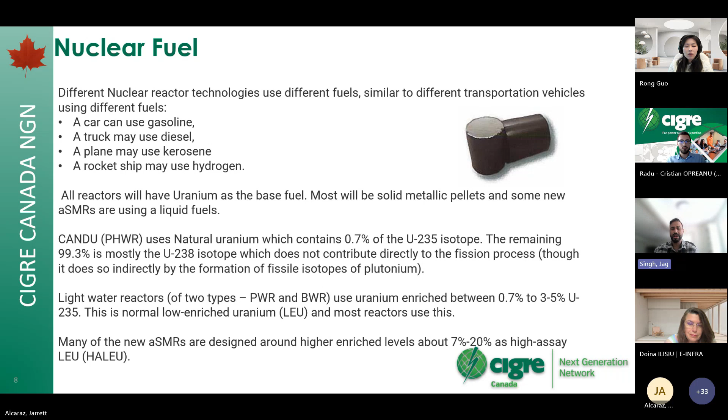So it's really important to understand the different reactor technology types are based on the fuel that might go in them. Here we have the CANDU reactor using natural uranium. What that drives is a technology which utilizes or requires heavy water - D2O. That heavy water is essentially acting as a moderator. So as the moderator goes around in that coolant loop, it slows down the neutrons we were talking about earlier with the fission to the right energy level so that it can be captured by the neutrons to go ahead and then maintain criticality - that's what's unique.

Having the necessity of having natural uranium drives a specific reactor technology type for it to work. If you try to use other pressurized water reactor technology, it wouldn't work, right? Because you're not getting the neutron capture at the right energy level. It's not slowing it down. It's not moderating that neutron enough to get captured.

So it produces more energy per kilo of mined uranium than other designs, but then also produces a much larger amount of used fuel per unit output. So there's pros and cons to everything. There's no perfect solution. It depends on what the needs are and what the requirements are of the operator, right? And that's the key thing.

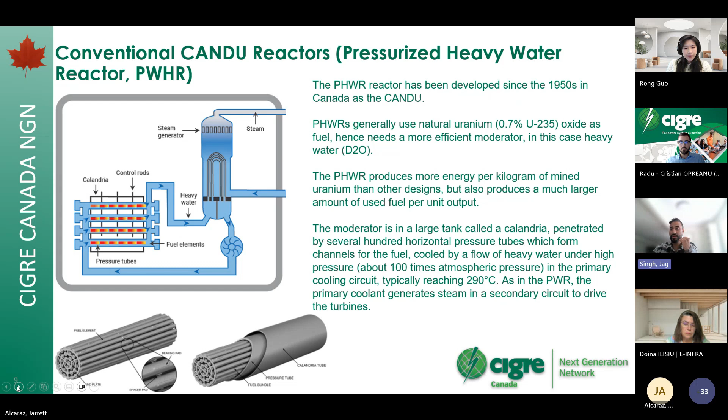It's like if you have a performance sports car, you don't necessarily want a diesel engine. If you want a high fuel efficient car, you are going to go for the diesel engine. So the reactor technology type goes hand in hand with the fuel.

So because of the size, what you're able to do is a lot of offsite works acceptance testing and factory acceptance testing and qualification, right? You can essentially modularize them off, right? That's what the M in SMR says, modularization.

Think of it building the whole unit, the core, or even some elements of the balance of plant, constructing that in a warehouse, cold test it, which is no nuclear fuel, right? Do your core testing behind it, check the pressures, check everything's working, and essentially wind back all the cables, disconnect all the piping, cap them, flange them, take it onto site, and then hook it up.

Because some of the most expensive projects, we're up at 32 billion pounds at Hinkley Point C. Vogtle went to $35 billion. That's what happens on conventional projects, because you have to do all of that exercise on the actual site itself, which drives up costs massively. Anything you do on a nuclear site drives up time and cost just because of the measures that you need there, right?

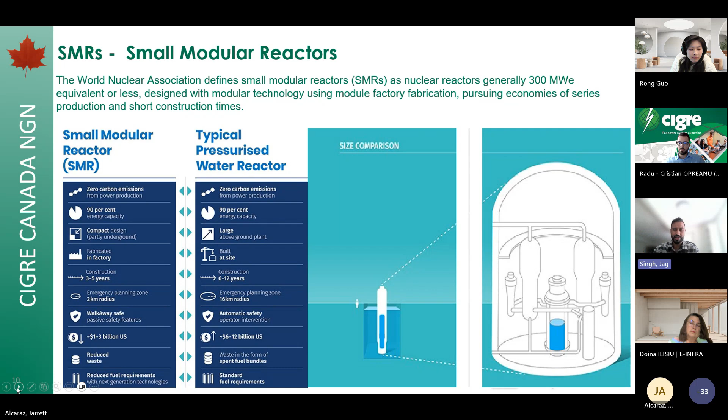The cost is significantly less. One, scale. Two, repeatability. Three, the idea is to run it off a production line as you would a car, right? On a manufacturing line. And some of the reactor technologies will have reduced waste, and we can talk about that in a second as well. So a lot of differences, and again, pros and cons. You do get less power output than you would from a conventional reactor.

So here's an example of the GE Hitachi reactor here. This is based on the boiling water reactor designed by GE Hitachi, the big one, the ABWR, and it's just a smaller scale. This is a Gen 3 plus reactor. And the idea here is you essentially push the water circuit through the actual reactor core, which turns it to steam, which turns the turbine. So you're actually boiling the water using the reactor, okay?

The refueling cycle on there, so every time you change the fuel, is 12 to 24 months, so 1 to 2 years refueling. And you've got a design life there of 60 years. It's 300 megawatt electric, and what that means in reality is that's powering the equivalent of 300,000 homes. So even though it's an SMR, that's a huge amount of energy that you're outputting, and it's stable baseload energy, which is different to your intermittent supplies of solar and wind.

We're able to essentially run this thing 24/7 for about, let's say, 320 days a year, accounting for plant outage and maintenance time. So massive amounts of baseload power, which is reliable and a high energy density.

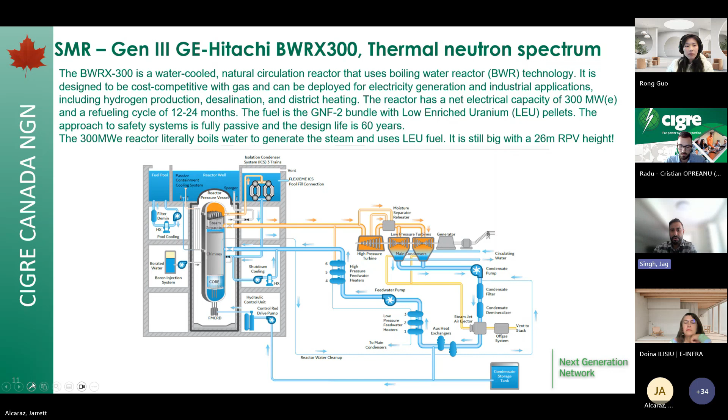So if you need steam generation for SAG-D up here in Alberta, you need high temperature clean steam, you can get that from one of these reactors. You don't even need to hook it up for electric purposes now, right? You're hooking it up to just provide steam. So that's kind of the different applications you can get for SMRs here. Each reactor technology type will have different applications.

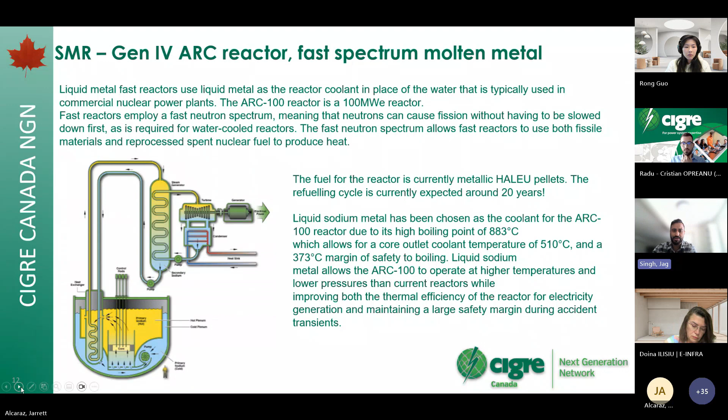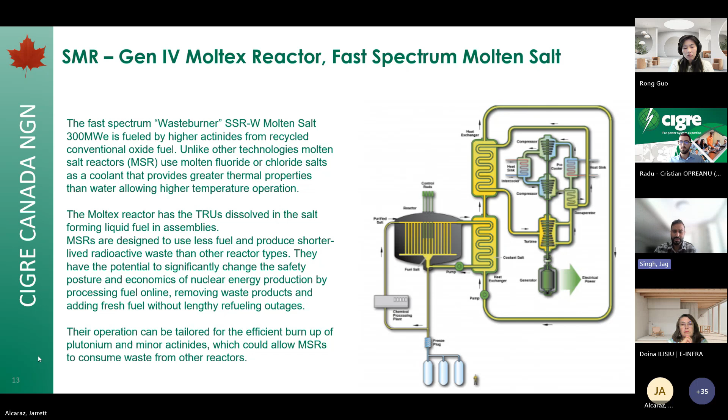And as we're saying, we can close the fuel cycle. So the output of this, once you end up with spent nuclear fuel of this, goes back into the recycling plant, the sister plant to this, to create more fuel. So you actually burn out a lot of the waste forms that you typically get from a nuclear operation. So really innovative technology, really, really important.

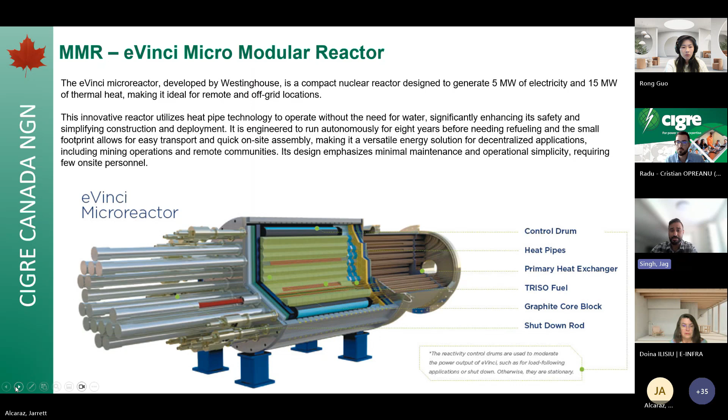So it's a lot smaller. This is supposed to fit on the back of a semi, so it's easily deployable, and it takes up a lot smaller footprint as well. It's really, really important that we start looking at all different scales and sizes of nuclear reactor technology.

We'll talk a little bit about safety, waste, and cost. These are kind of three of the main areas that I always get asked questions about. What do we do with the waste? These nuclear plants are expensive, and what about the safety side of it? So we'll talk a little bit about safety.

As I mentioned earlier, some of the Gen 4 reactors now are self-regulating, self-shutting down. It's essentially impossible to have a nuclear meltdown, right? Because here's a safety feature, a negative void coefficient that features in one of those reactor technologies there, which is the hotter the reactor gets, the less reactive it gets, essentially. So it's self-shutting down. It prevents the runaway reactions, and you end up essentially having an inherently safe, walk-away safe reactor.

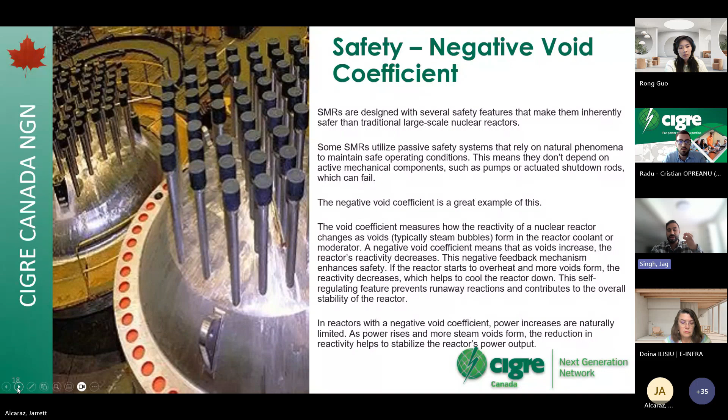You're going to keep hearing this term a lot now as we go into Gen 4 reactors and some of those innovative technologies. So that's the negative void coefficient, and the way it works is you end up with these kind of voids in the form of bubbles, and that reactivity then becomes very inefficient and it shuts itself down.

Some innovations, we saw some reactor technologies in TRISO fuel, the eVinci, for example. And this TRISO fuel, that's become the safety element of this now. So as you would typically get those fuel ingots where you'd have the fission products and decay products featuring in the actual fuel, this is contained now within a ceramic ball. So the fission products are contained within this, and they're tested and qualified up to insane temperatures.

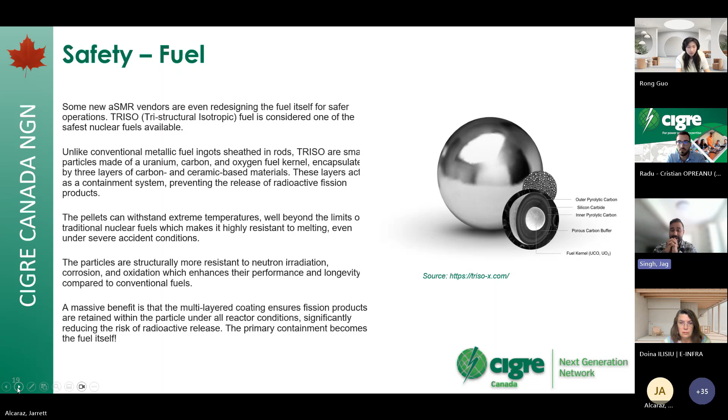We're talking really, really, really high temperatures where they don't melt because it's a ceramic form. So the idea again is the fission products are contained within this, and if it can withstand those extreme temperatures, the fuel itself is inherently safe now. Innovation goes beyond just reactor technology and now into fuel as well.

Waste. So we get typical waste forms: low-level waste, intermediate-level waste, and high-level waste, and it's classified as such depending on its heat output and radioactivity, the dose output. As we fission away that fuel, only 10% of it is actually fissioned into the daughter products. The rest of it's actually unspent fuel, right?

That's why the term waste form is now called used fuel form, because there's a real intent. The UK does it, the US does it, France does it, and you can recycle and reprocess that fuel. You can actually strip away the 10% and then reuse the 90% essentially.

So what is nuclear waste? As we fission away and we split those atoms, that's what the daughter products are. That's what the fission products are. The daughter products are the split atoms, right? That's what is widely known as the nuclear waste. And it's important to understand that there's all sorts of different radioisotopes that are formed here.

Those that are high dose have shorter half-lives, right? So those half-lives come right down, but they're very, very active. They're pretty dangerous, actually. So the idea is, as soon as you have nuclear fuel in a conventional reactor, you want to essentially store it in a spent fuel bay in a pond, a giant swimming pool of sorts, for 7 years to let them cool.

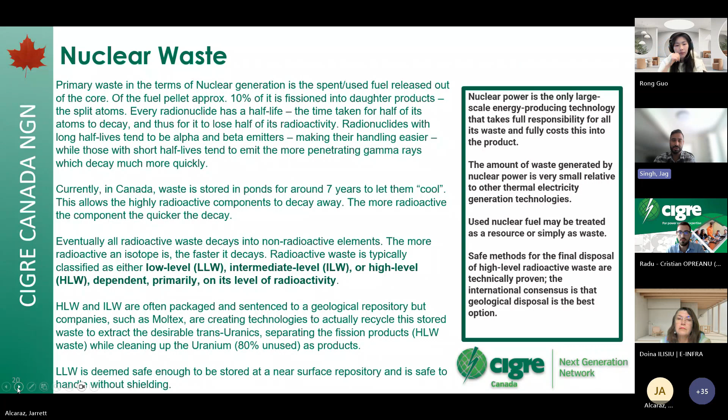Okay, so I'm going to quickly skim over these because I know we're getting short on time here.

If we were to take all the generation of the US fleet over the last 60 years and put the nuclear waste on a football pitch, it would essentially stack to a depth of less than 10 yards. All that power for 60 years across that entire fleet that we saw earlier is less than 10 yards. That is an immense amount of energy output per waste produced, right? You've got to be really cognizant that that's the case.

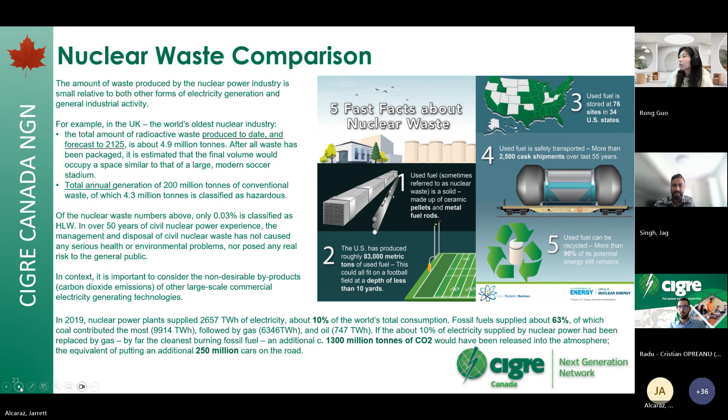There's a rendering of it right there. You can see all 60 years of the entire US generating fleet, that's how much waste output, which is not a lot. Here's another infographic here. Look at that bottle just on the side there. Every year, the UK's nuclear power stations produce 0.84 litres of waste per person. Of that, the high-level waste, which is the dangerous stuff we're talking about, is only 25 millilitres per person.

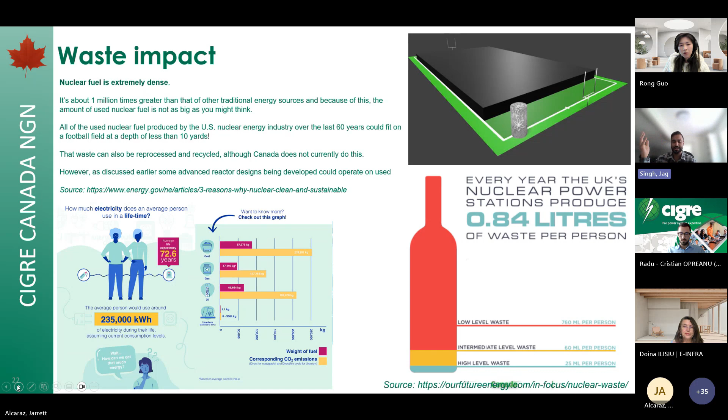Okay, and that's accounting for all of your energy demands that you would use in a day, from your clothes, from your car, to your TV, to all your devices that you use. That's how much waste per person is produced. It's very, very little. So we shouldn't get worried about nuclear waste being this stockpile of insane amounts of dangerous material. It's actually very, very small for the energy output we need.

The energy density, the amount of energy that you can produce from uranium pellets, is orders of magnitude higher than anything else. So it's really important to understand. This is why nuclear is important as our future energy technology. It's very, very important that we continue to develop reactor technology to hit the 28,000 gigajoules per kilogram, because that amount of power is incomparable with everything else, right? So, extremely energy dense. So let's translate into a couple more infographics.

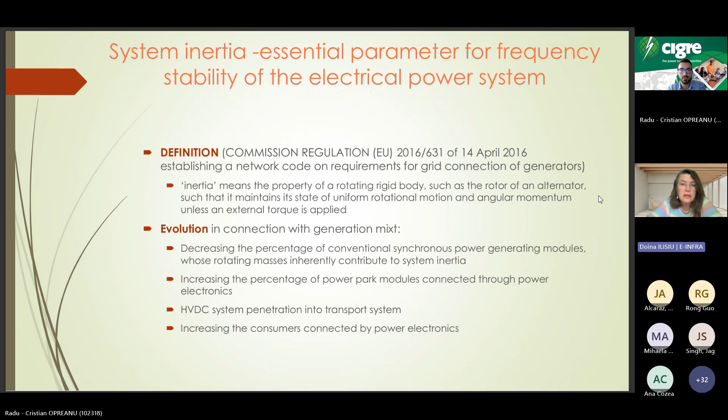So, inertia, the second slide. Inertia is a parameter very important for the stability of the electrical power system. You know that synchronous systems are systems connected to form an entire system, which means that they have the same frequency. In this, the reaction of each rotating machine or new power generation is a response to the variation of the frequency, and this is named inertia, the inertia of the system.

It's something which characterizes the evolution, contribution and situation of all contributors of the system. Machines, generators, alternators, where the inertia of the rotor of the alternator is the most important for the total inertia, and of course also the consumers, with a smaller contribution, but they also have it. You will see in this presentation what this means and its importance.

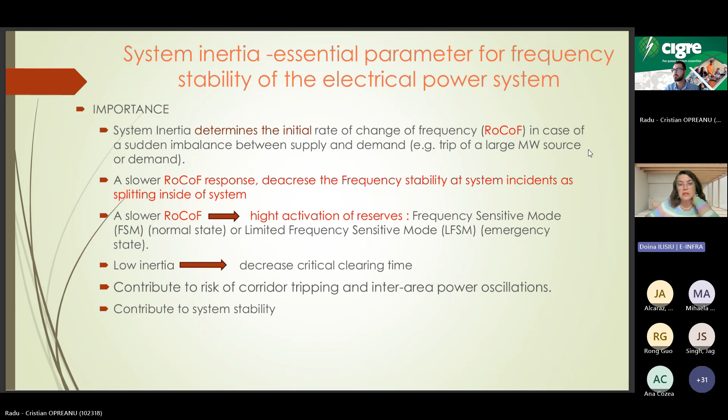And so having good inertia means that we can contribute to system stability. The next slide - which systems are like turbo generators? Why? Because they have a natural inertia provided by rotor inertia, for short circuit ratio, excitation, and they also have a good excitation system ceiling factor. That means that the turbo generator, also present in the case of nuclear power plants, has a good contribution to inertia.

Also, in the domain of frequency and also in the domain of voltage, they have the possibility to have this PSS, power system stabilizer, which helps the system in case of big perturbation.

So the main influence, you can see that the typical values which cover a wide range of technology are between 3.5 to 8 seconds. I have given an image of those critical clearing time curves related to external reactance, and the values. You can see that the best values are related to gas, hydro pumps, and also nuclear. We consider nuclear around 6.5 or 6 seconds, which means a good contribution for inertia, a very good contribution for the system.

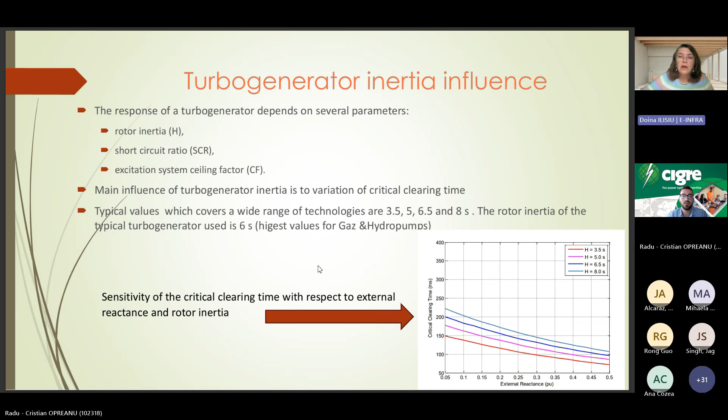I repeat, because a nuclear power plant turbo generator contributes not only in frequency and inertia, but also in voltage, taking into consideration the excitation system ceiling factor and some apparent power contribution. Next slide - sorry for this, it was a little bit more animated, so you can understand it better if you have interest by looking at the screen now.

This is the situation of inertia in 2020. It is a situation which I have, but I can say it's an optimistic situation, because now the decommissioning of a lot of classical units has decreased the inertia. You can see in red the countries which have a limited contribution to inertia. Those countries need to take actions to increase their contribution to inertia, and also to provide other solutions for good responses to ROCOF. We can see that Romania has had a good contribution this year, though probably now the contribution is less - you will see what happened.

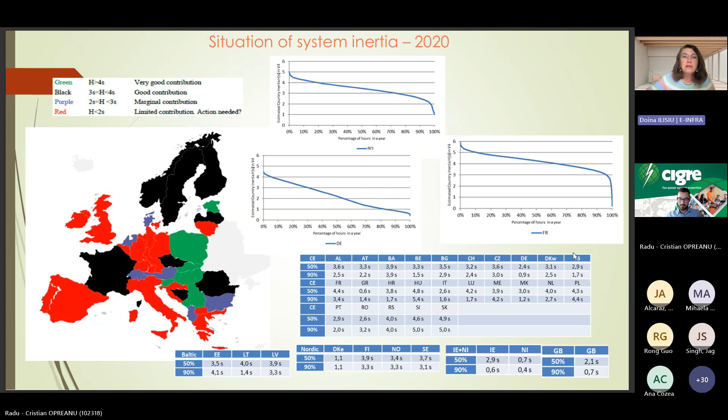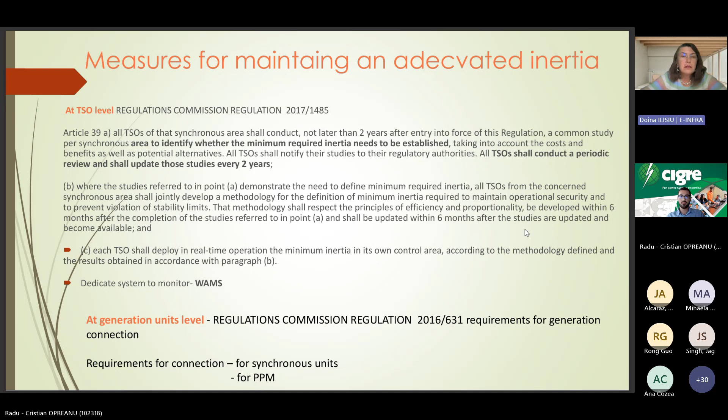And those possibilities, those features, soft and hard implementation at the level of the units, especially for PPM because nuclear power plants have intrinsic inertia, is named grid forming. That means all devices must have this contribution, must provide this contribution. It's accepted in the grid only if they demonstrate that they are capable of facing RoCoF. That means to increase synthetic inertia for the system, adding to the natural inertia of the system.

I can say also that we have two kinds of requirements for generation: grid forming and also grid following. Grid following is related to the contribution to variation of frequency, as LFSM and FSM, as I've said, which is also required for nuclear power plants. But grid forming is not required for nuclear power plants because they have intrinsic inertia. It is required, yes, for HVDC, which are, let's say, coming exactly in the former place of the nuclear power plants, but for all HVDC.

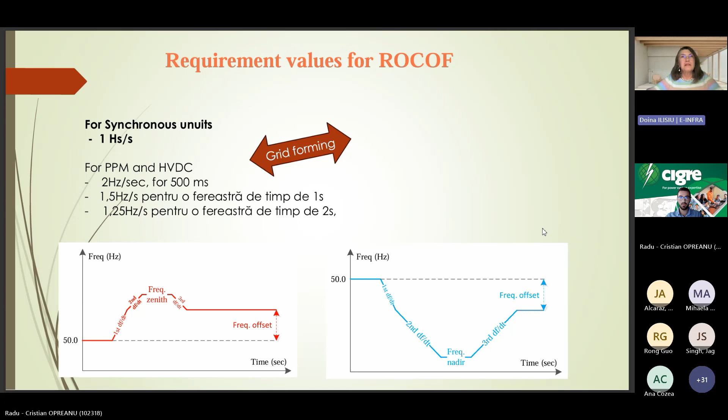this ROCOF. And what to say, we need nuclear power plants if they are safe, and they are safe, you have seen, I believe in it. And we are very happy to have it as system operators from point of view of inertia. Thank you.